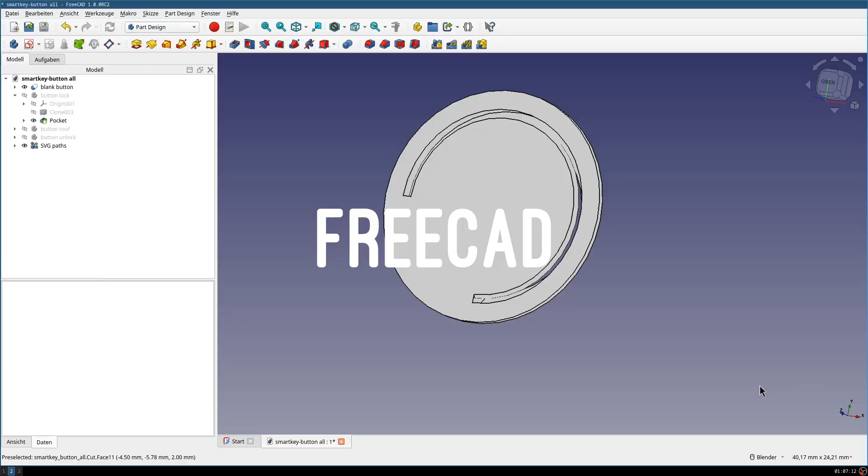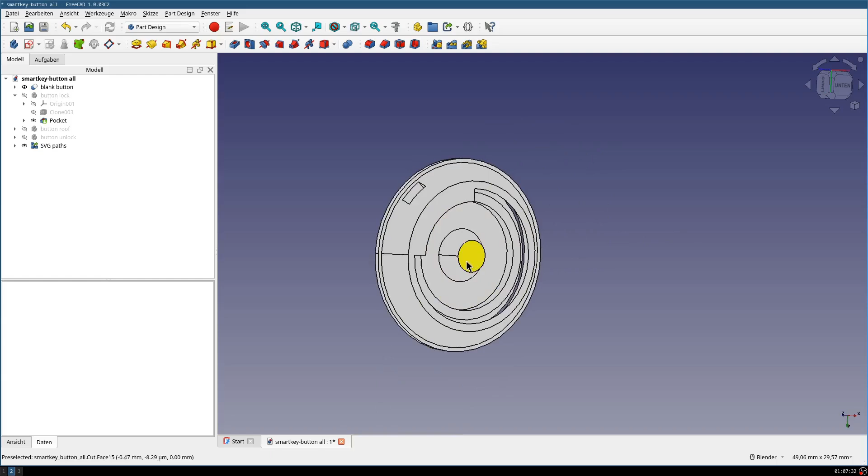So this is a button in FreeCAD, and you can see it has, this is where the button holds. This is the clearance so that it can move up and down. You have the bottom side of the button, which actually actuate the electrical button on the circuit board. Then you have this little hole, which is just used to help with removal from the PEI sheet. You can stick a screwdriver here and then sort of lift it off if it sticks very well.

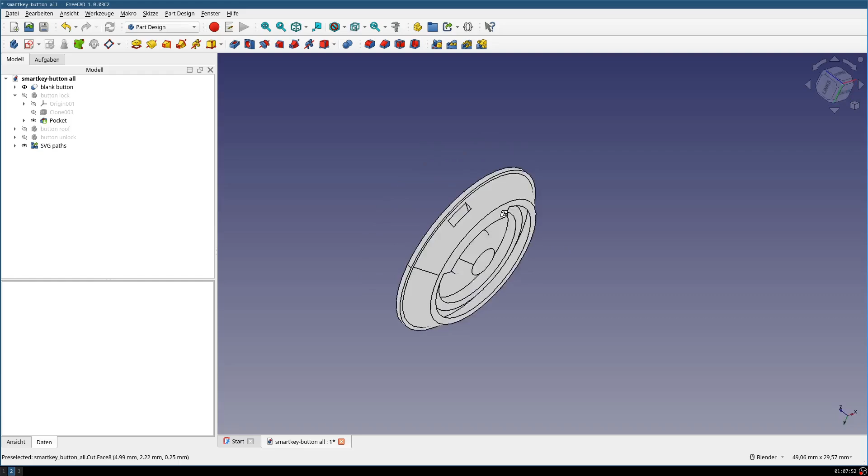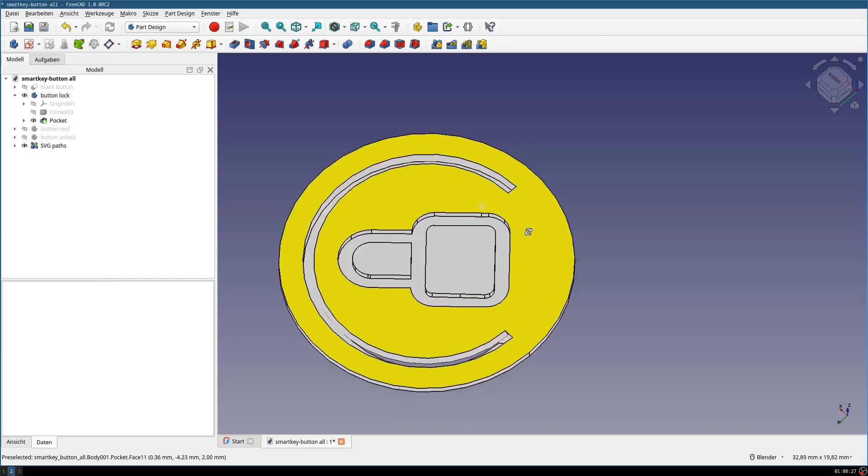There's not much that you really have to do in FreeCAD, but if you want to add your own logo, I found the SVG import and placement to be a little bit tedious, and I will show you how that basically works. So let's assume we want to put the lock on here, which is already available, but let's assume we want to do the same again, like emboss an SVG here.

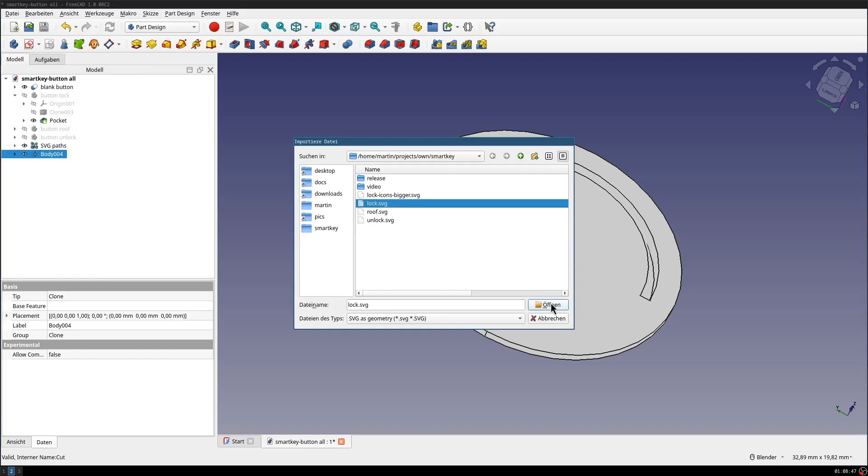So I take the button, make a clone, and then import an SVG file, usually an Inkscape SVG file. That works fine. I import it. There we have it, not at the right location, but it's there. And I usually make the dimensions in Inkscape pretty much exactly what I want here, so that I don't have to do any more scaling here.

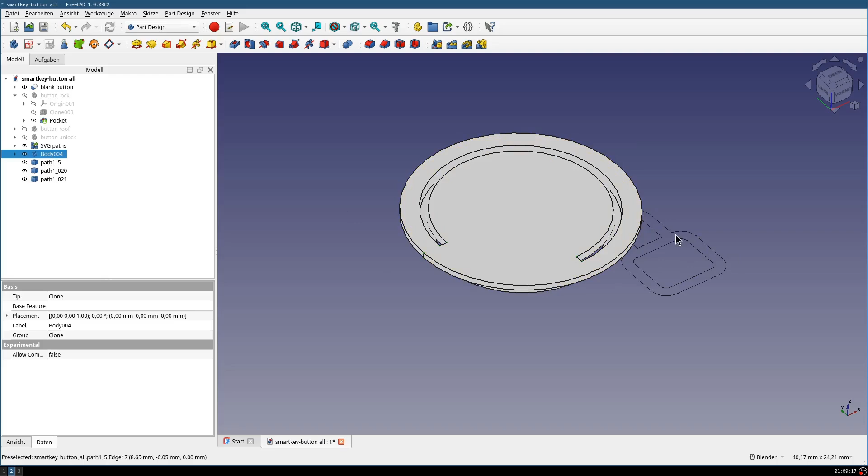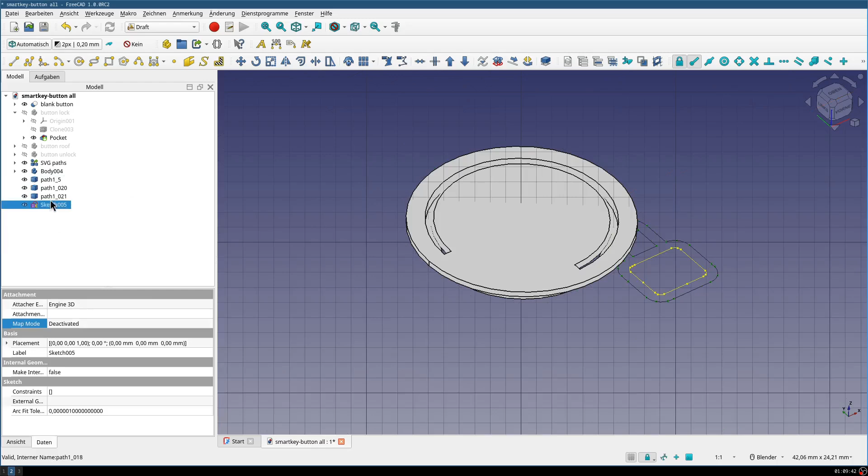This is a part that's a little tedious because you cannot just grab and place it. What you sort of have to do is to make these paths into a sketch, and that you can use to emboss into this surface. So I would grab these ones, go to the draft workbench, and then use this button. That's the key here. That is draft objects to sketch. You get a sketch, which is an unconstrained sketch, but it's not a problem.

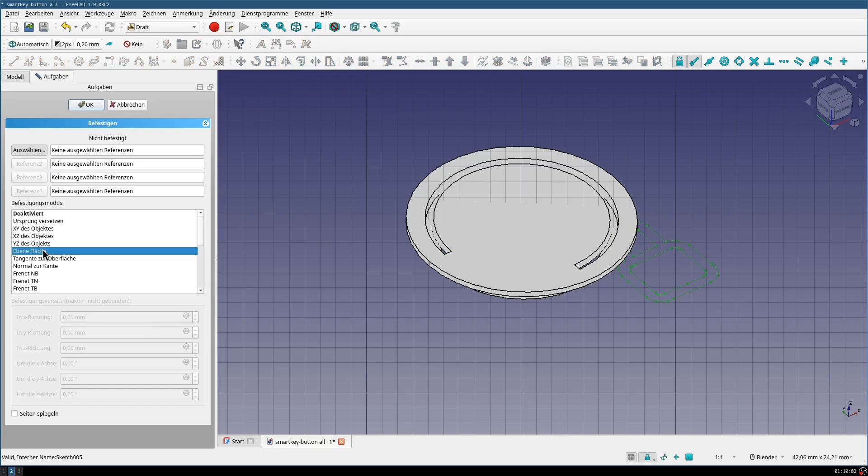Then you can remove the path objects or hide them away somewhere. Move the sketch into your new body, and then attach the sketch. I use map mode and then flat face, and then this one. This will move the sketch onto the same plane as this face, but it's not positioned correctly yet.

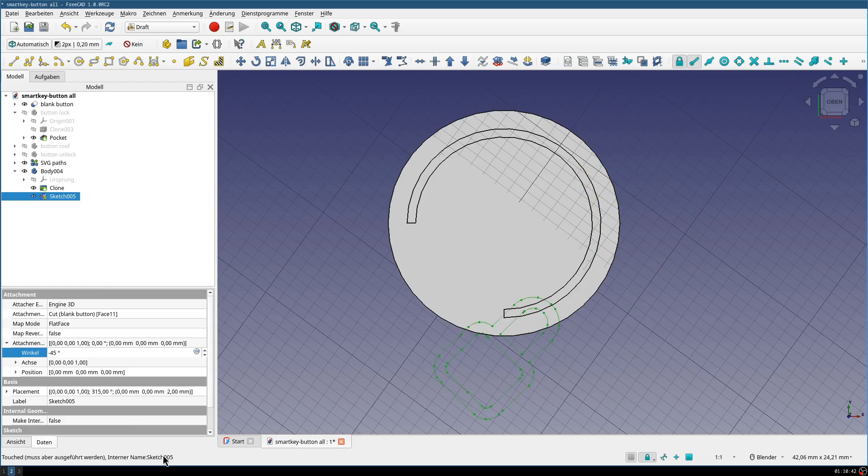And this is also a little bit tedious part. I want to turn it so that the bottom half is in line here, which I do by turning the sketch here right away. It's 45, no, minus 45, okay, that's correct. For some reason you cannot use the transform feature here. Oh, I'm doing something wrong.

Then I open the sketch, which gives you a lot of constraints here that are not really helpful in this case. But yeah, let's zoom in again. It gets a little bit slow.

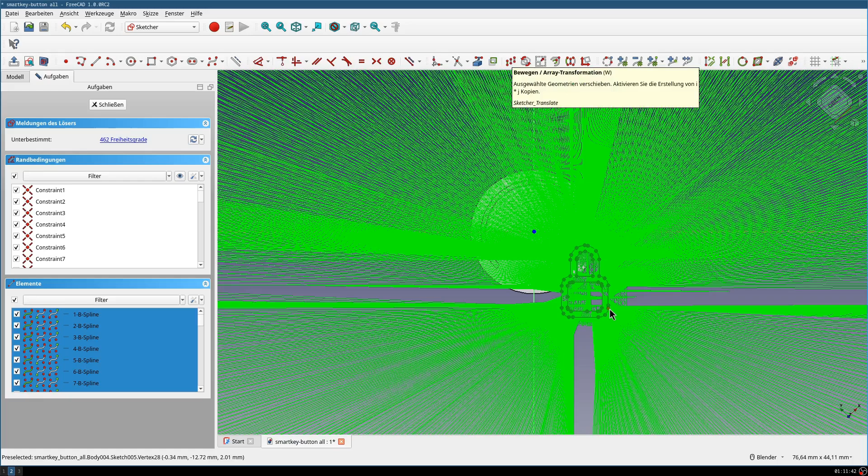Then I select the whole sketch, all parts of it, just by left clicking and selecting it. And then this button is important. That lets you move, translate the whole sketch without defining any constraints. Just grab it and move it from some point to another point.

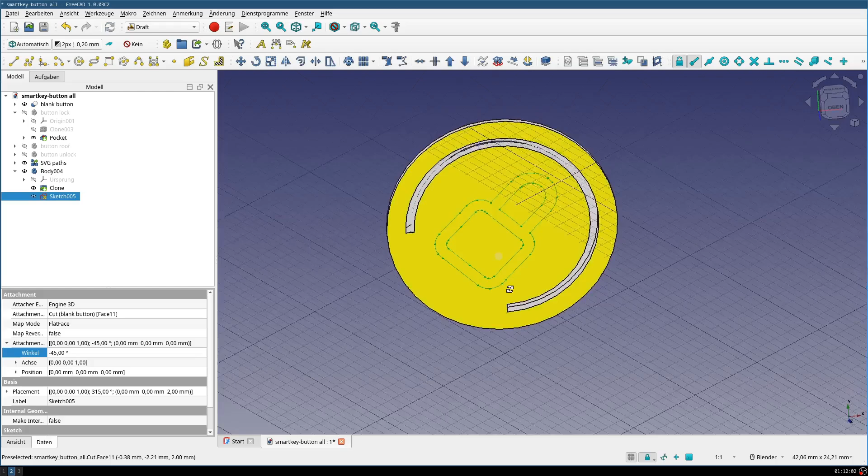And I want to, I think this one here will pretty much be the center point. So I click here once and go there. Move it over, close it. Does it look good? Looks fine. And there you have it.

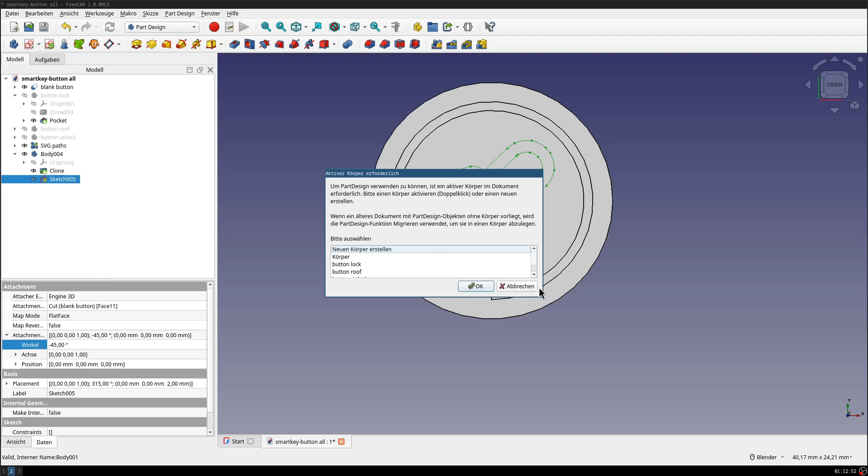Now you can go to the part design workbench again, where you have your sketch, which is sort of hidden here. And then emboss it as usually. Okay, this body is not active. Let's make it active. Emboss it. Tries to go through it all. 0.4 is correct here.

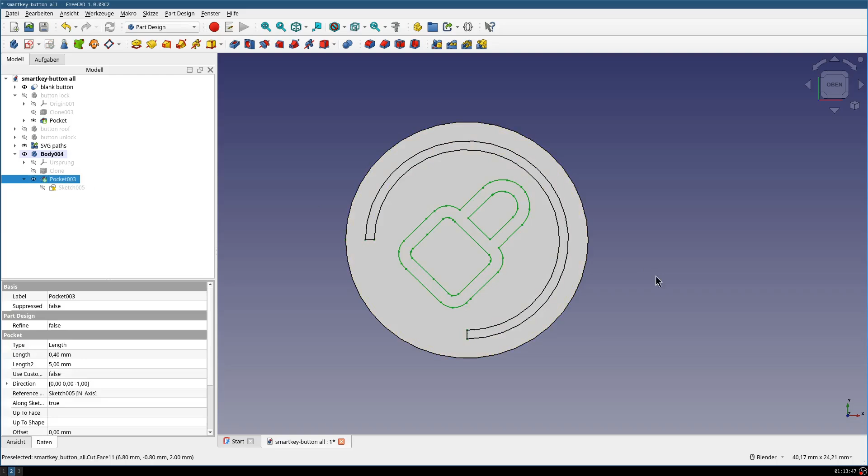That was kind of stupid, but everything is all right. I'm overlaying with the blank button, hiding my edits. So there we have it, embossed as per usual. That took me a little bit to find the options to combine the path and then move them.

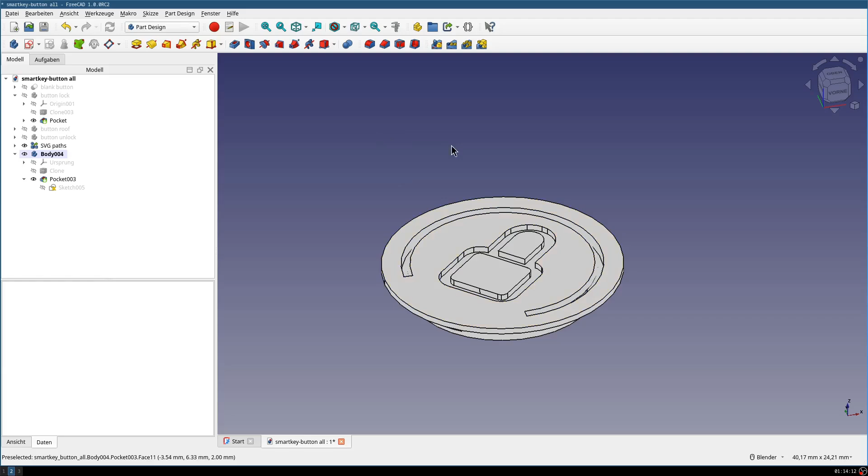But in the end it worked out quite well. Now you can grab the body and export it to STL and run it through your slicer.

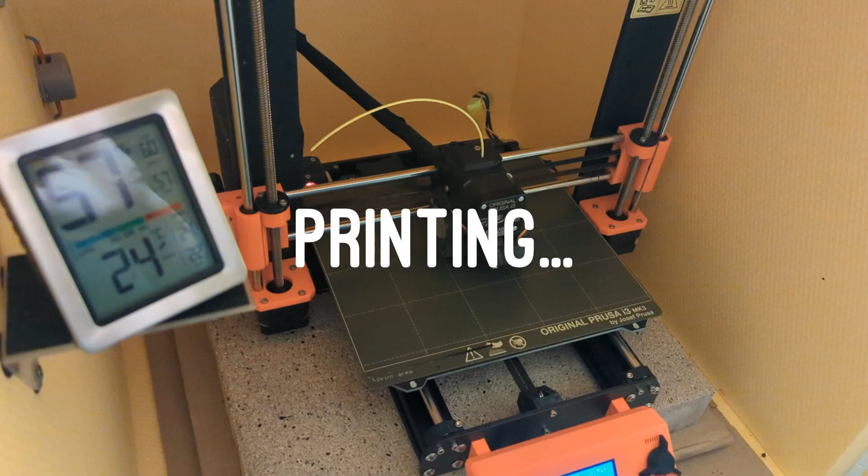So for such a small print, I usually just use a little piece of filament so that the color change is not such a hassle. And with this one in particular, it's printed on the PEI sheet, which you should normally not use for PETG. But I will do that here because the PETG attaches very well to this, which is good for such a small model and the small nozzle and the fine detail that is used.

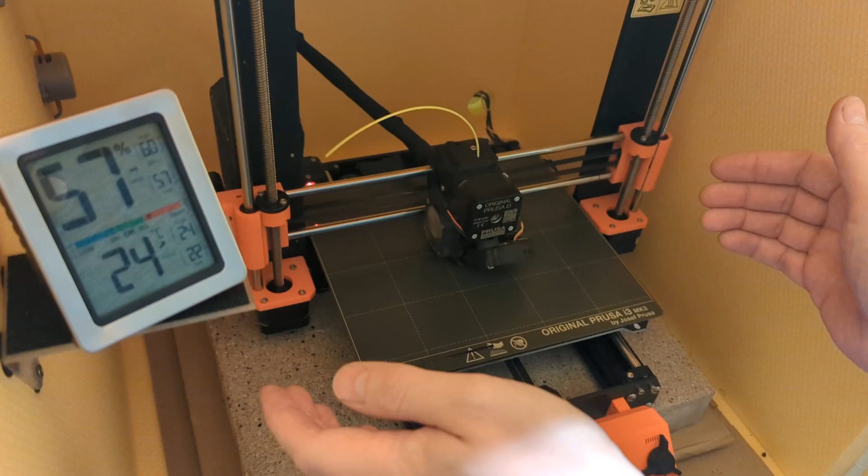Once this is done, while it is still hot, I do not recommend this, but it's the way I do it. I just grab the sheet by the sides. It is hot, so maybe you want to wear gloves if you do something similar. I will grab it and take it to a sink where I have cold water running, and run that water over the part, and it will sort of shock it.

Then it releases way easier than if you have it cool down. For such a small model, the flex of the PEI sheet will not help you release it, it will just bend with it. It's very difficult to get off. I also added a small feature in the print itself where I can stick in a screwdriver to help lift it off. You will hopefully see that.

Now I'm locating the feature for the screwdriver. Usually takes a little bit. Then it gets...

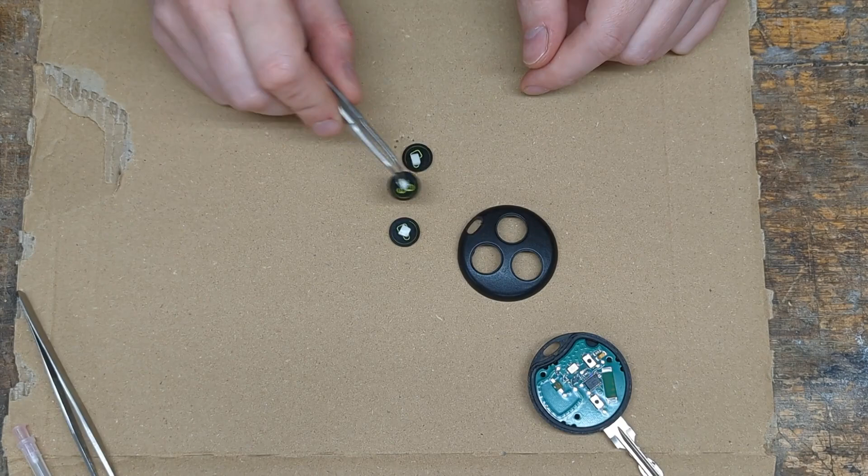So that I can position them in the top. Now I need to apply...

the positions right. Need to apply glue to the ridges, and I think what will be best is to maybe use a syringe and just put an ever so tiny amount on there. I use CA glue, just regular CA glue. Let's see if this works.

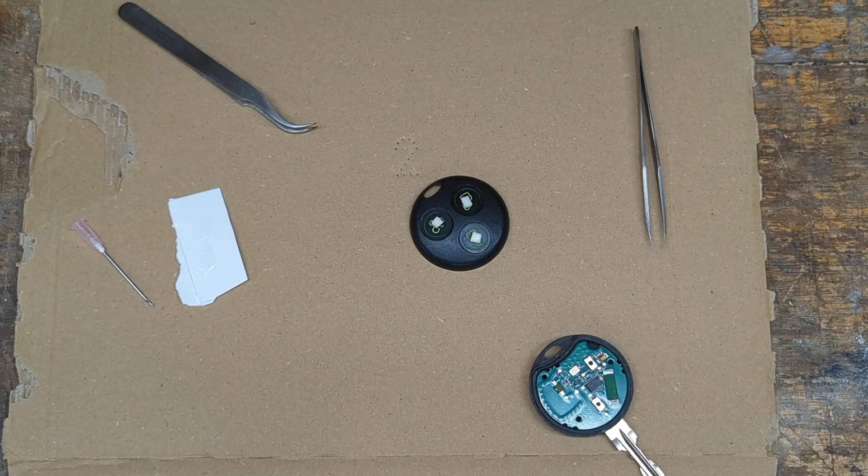Applying some pressure to the glue like this. Okay, I think we have it. Now let's have this cure for a bit. I don't want to spray a CA activator on this, I don't know how the rest of the plastic will react to it. Sometimes it gets very bright white or gray. So let's just wait a bit and see how this goes.

So let's have a look how our little project turned out. I've given this about 2 hours to cure. It should not stick to there.

Spilled a little bit of glue there, but it does look good. Can all be actuated.

Yeah, I think that's fine. And remove a little of the glue. Yeah, it's not a masterpiece, but I think it came out quite nice.